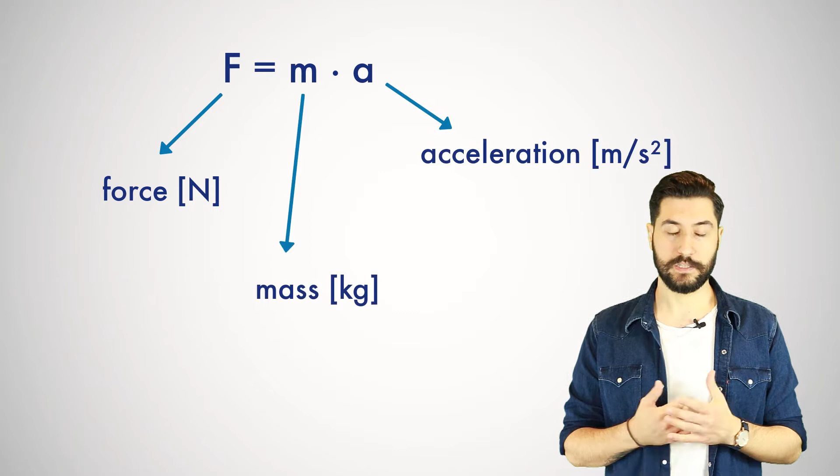A good guide value is, for example, a well-trained construction worker with a weight of 100 kilograms, who causes a force of 1 kilonewton due to the acceleration of gravity. We engineers consider forces to be somewhat simplified because our calculations are usually idealized.

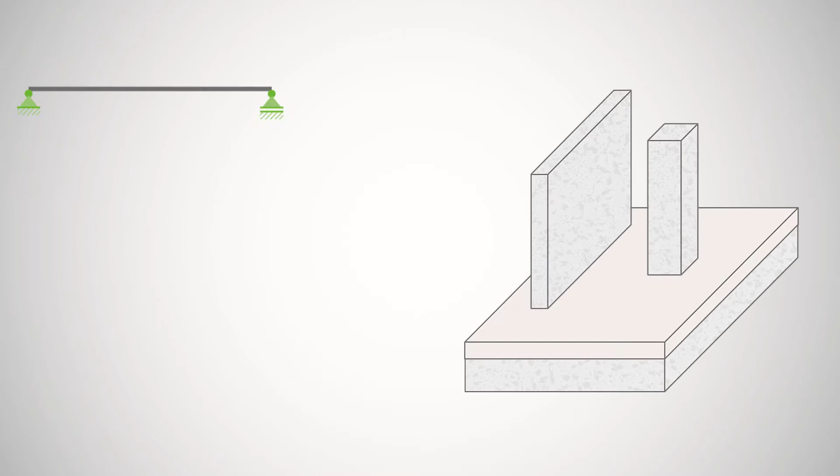Forces that act permanently or only sometimes on a structure, such as the self-weight of the structure, wind, snow, or even vehicles are called loads. We can divide these into the following types, depending on the target surface. Single loads. These are forces applied at specific points by an arrow indicating the direction and the point of application, such as the load transfer of a column to a foundation.

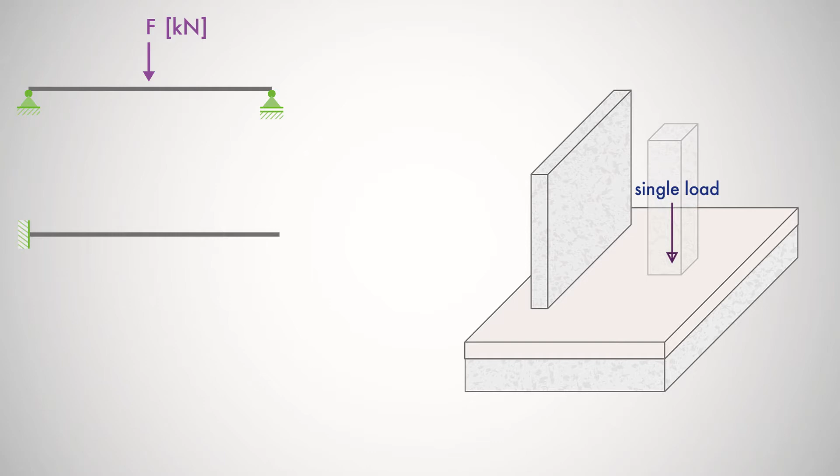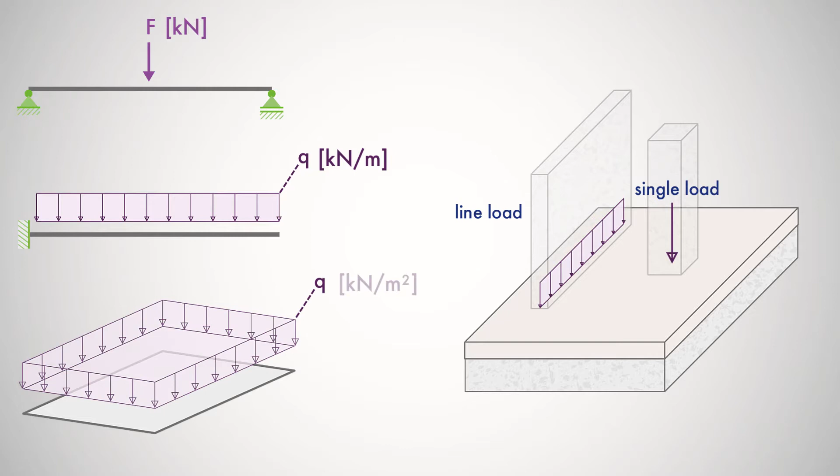Line loads. These are forces distributed over a certain length, indicated by a series of arrows, such as non-load-bearing walls. And forces distributed over a certain surface are symbolized by a surface of arrows, such as the floor structure of a floor slab. These are called surface loads.

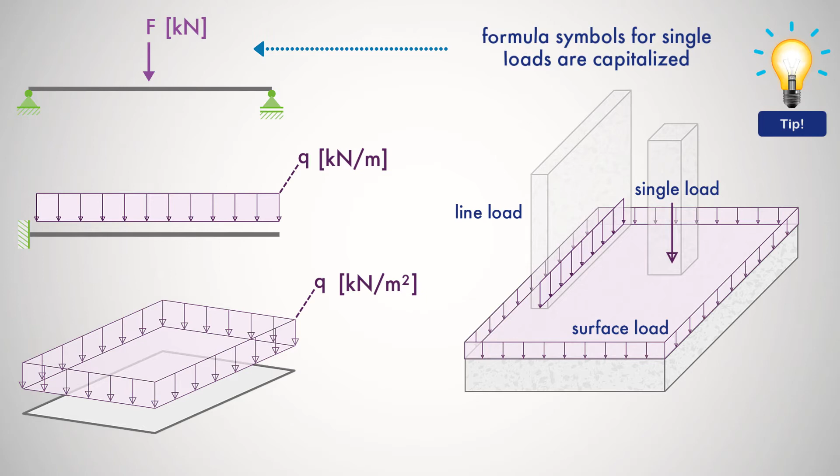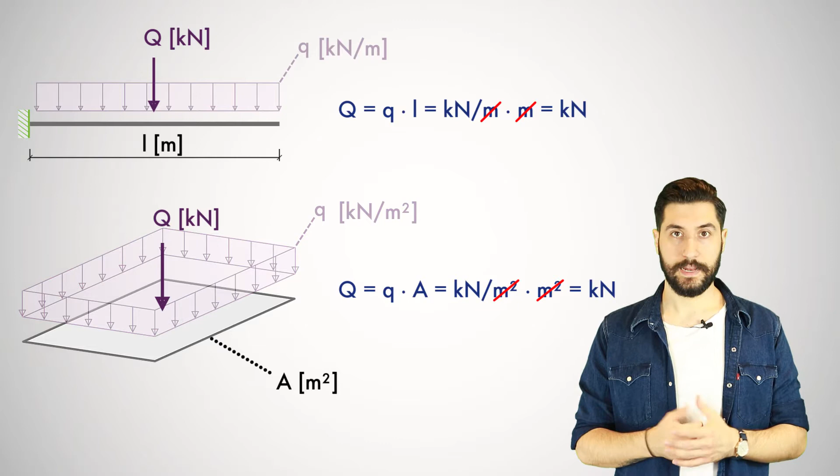You can find the resulting concentrated load from line loads and surface loads by multiplying it by the respective length or area. However, there are not only constant line or surface loads. Trapezoidal or triangular loads are also very common in structural design. For example, by the load distribution of a floor.

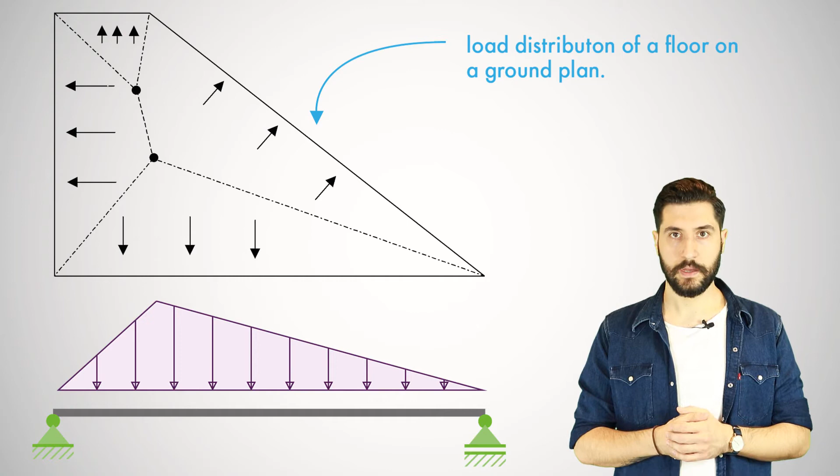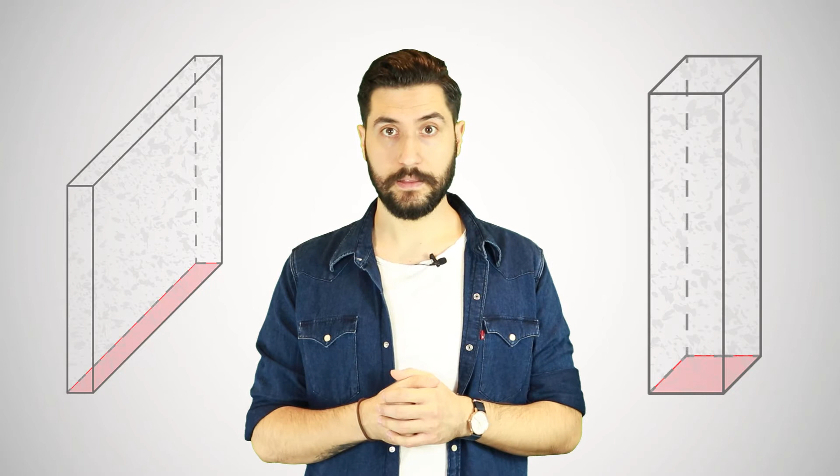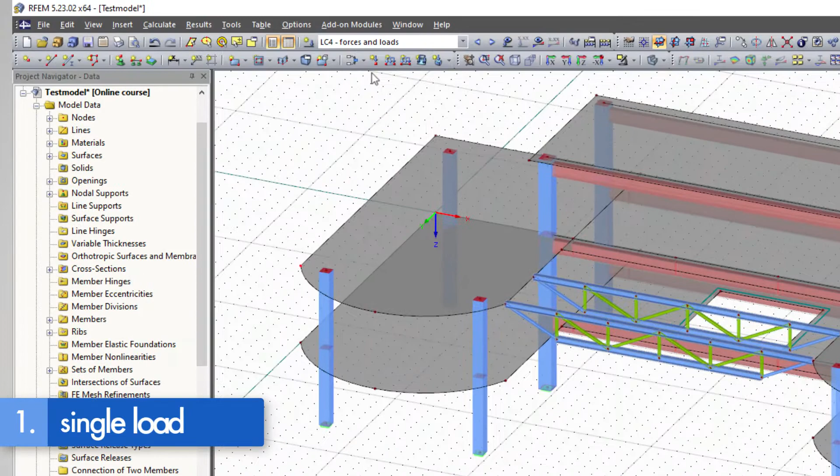First, we select the desired load case in which we want to enter our loads. A single load corresponds to a nodal load in RFEM, so we simply click the node where we want to apply the load. Then we select New Nodal Load and enter our load parameters.

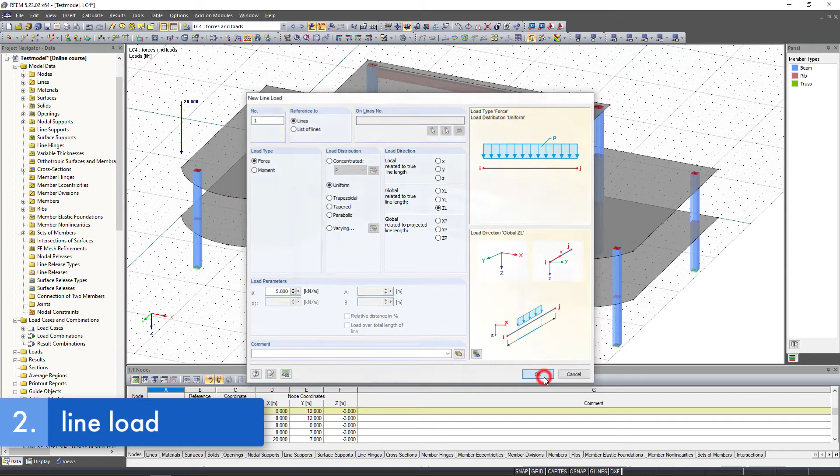To enter a line load, we have to differentiate between line loads and member loads in RFEM. If we want to apply the load to a surface that is surrounded by lines or on which lines are located, we use line loads. For beam structures, we use member loads instead of line loads.